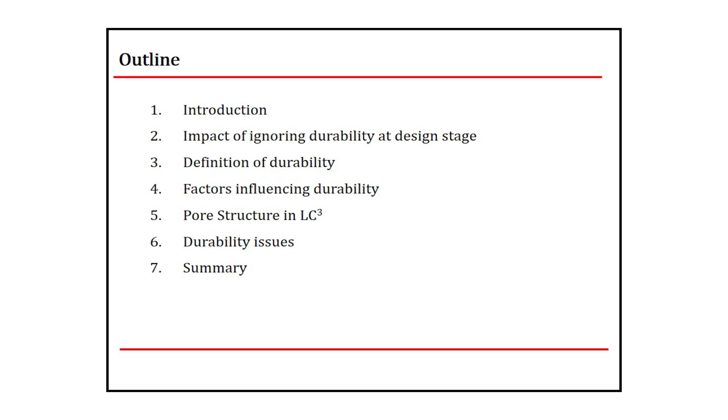This is a brief outline of my presentation: some introduction, impact of ignoring durability, how do we define durability, what are the different factors that can influence durability, something related to durability issues, and a summary.

First of all, when we design a structure, so far, how do we design it? We design it taking the tensile strength, compressive strength, and flexure. We provide the reinforcement detailing. For durability, what we do is we simply provide a cover, right?

Under the prescriptive guidelines, we have the water to cement ratio, minimum or maximum water to cement ratio we can go to, how much cement content we have to add, and finally a cover varying from 25 to 75 mm depending on the exposure class - severe, extreme - and we feel we are safe.

Is it adequate enough, or do we have to consider durability in a more specific way than just prescribing? Because nowadays, earlier it was just OPC, but now after every few years we are able to find more and more new SCMs. Do all these SCMs need to follow those guidelines, or do we have to do something better to assess these and change these durability requirements?

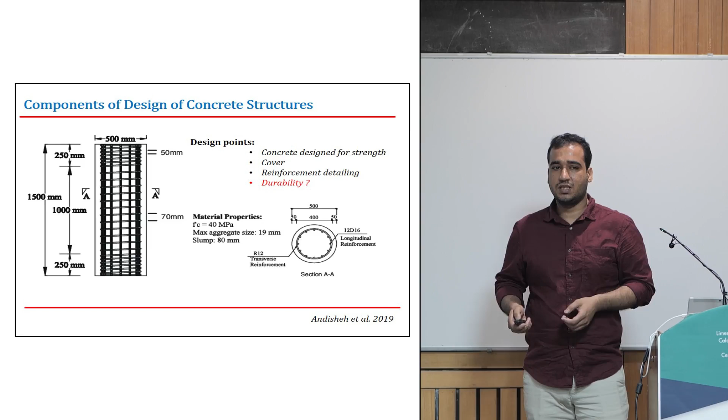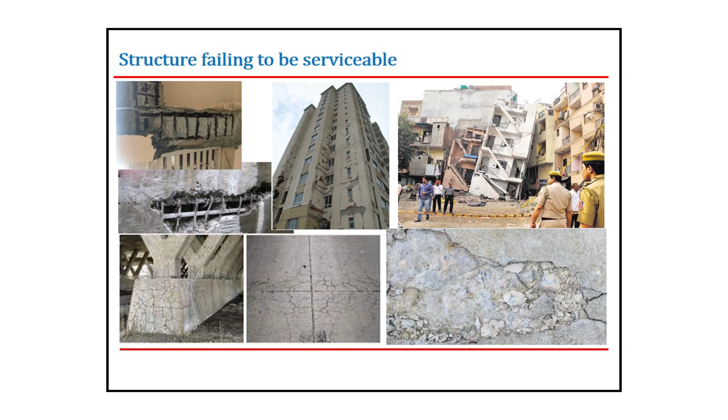These are some more pictures, from the recent site visits Professor Bishnoi did in Delhi NCR. You see lots of buildings, lots of cracks, some even toppled. So these are the issues that we face.

Now, do we take care of these issues at the design stage? Probably not. We need to consider that.

Now, a quick survey. How many of us actually believe that concrete durability is a property of it? I want the professors to sit out of this, let the students. How many think it's a property of concrete? Just raise your hands. Nobody thinks it's a property of concrete? So there are quite a few who think that durability is actually a property of concrete.

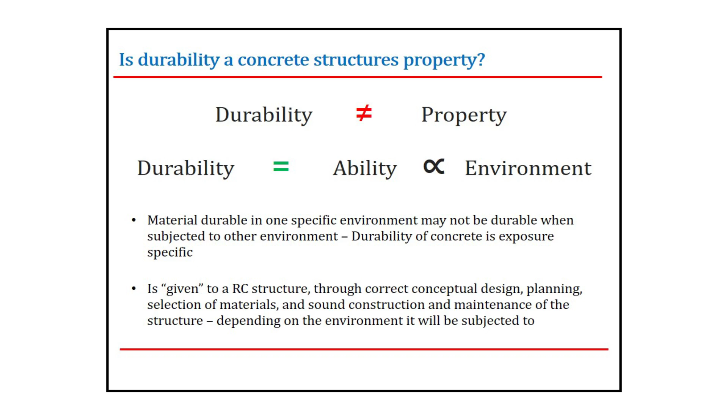Surprisingly, it's not a property of concrete. It's an ability we provide to the structure. We design it to be durable. Durability depends upon the type of material and the type of environment we are subjecting it to. So we have to design a material to be durable in a certain environment.

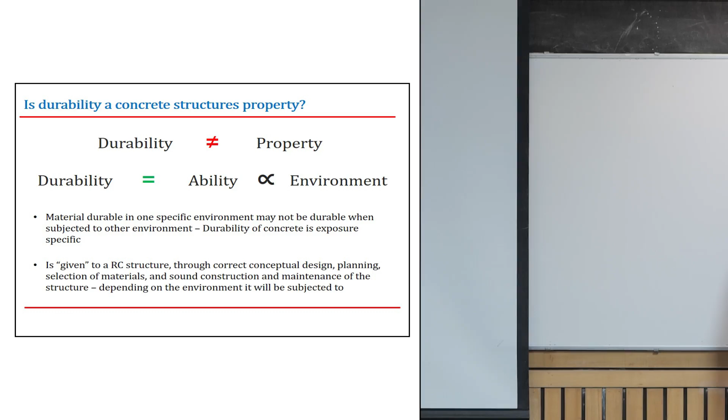And how do we design it? We design it by taking proper conceptual planning, selection of the materials, sound construction practices, timely maintenance of the structure, and all this knowing what environment we are going to subject the structure to.

Now, how do we actually define durability? So far it's an abstract kind of word, just like my friends talked about compressive strength, M25. When I say M25, I know what M25 means - it's 25 megapascal of strength. And if we are able to achieve it, then we say, yeah, that's the strength.

But what about durability? Are we able to do the same thing with durability? Can we label something as durable and subject it to a different environment and expect it to be durable again? No, we can't do that.

So how do we define durability - although over the years the view keeps on changing, I'm trying to introduce a relatively new view of durability. Maybe if you have read in the literature, you might be familiar with a different definition, so just bear with me, this is a new one: it's the ability of a structure to withstand the design environment over the design life without undue loss of serviceability or need for a major repair.

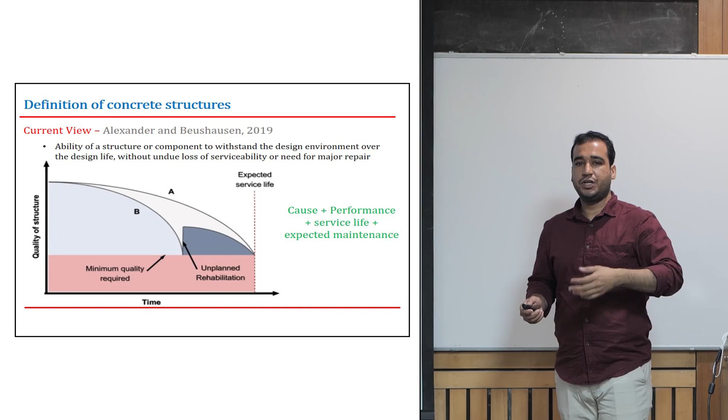Maintenance doesn't mean that you have to do a large scale repair of the structure. It means minimal cracks or some local damage you can repair with. It's not about completely scrapping the structure, repairing it, and then saying, see, it's serviceable again, look, it's having durability. No, you can't do that. It should have a limited type of failures - fissures, cracks - not a complete deterioration of the structure. If we are going for a major repair, then surely your structure is not serviceable.

Now, what are the common factors that influence durability? Just like I said, it's an ability that we provide depending on the environment. So how do we provide that ability? As a designer, we are flexible with the materials part.

Environment is not in our control, so we decide depending on the environment. This is a twofold thing where two different factors influence durability. One side is material properties - aggregate to binder ratio, water to cement ratio, porosity of the structure, air content, quality of concrete - and the other side is environmental factors, including temperature and moisture.

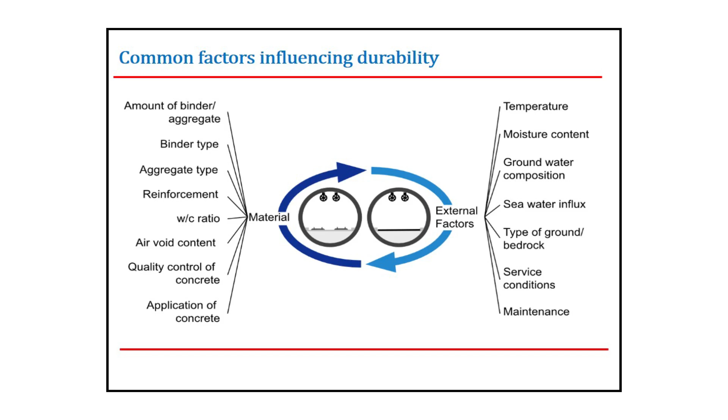These two things vary everywhere. You came to Delhi from different places, you must have felt the change in moisture and temperature. So those are the two things. Another interesting factor is groundwater composition, especially in Delhi, where in many regions groundwater has chlorides, which can be very deteriorating for your structure. Other factors are maintenance, other ions in soil or seawater, or carbon dioxide level in the environment.

Now the thing with durability is, unlike compressive strength which we decide at 28 days, durability is not something you can decide within a month or 90 days. It's design life. Can we wait for the design life to test something - cast concrete today and wait 50 years to see if we can use the same mix design for casting the structure? No, we can't. We have to pre-assess whether it will last for the next 50 years within a maximum time frame of 90 days.

So how do we do that? To assess this, we majorly focus on certain tests - some are accelerated tests, some are not accelerated but more property or material specific, like porosity and pore size distribution. This is one factor you would see discussed in every durability issue, because in concrete, all the transport happens through porosity and pore size distribution.

When we talk about durability, it's majorly about the ingress of species from outside the concrete to the inside of the concrete. So this is one factor you have to think about a lot when discussing durability.

Now there are other tests - water absorption, how much water your concrete is able to absorb. That gives you an idea if it's subjected to a dry environment, how much moisture will it take. With moisture, lots of things will be going inside. Depending on your wetting and drying cycle, you can decide how much it will absorb each time. Next is gas permeability.

One of my colleagues asked about carbonation. Carbonation is a gaseous phase, so it gets into concrete through the voids that contain air. So the permeability property for such things can be assessed by gas permeability, but I will explain in detail afterwards how it can sometimes be misleading if we just focus on one test and ignore the others.

Some other tests are resistivity - often we have the concept that if we have high resistivity, our concrete is more durable. We have this notion. Secondly, there are the rapid chloride permeability test or rapid chloride migration test. These are the two tests generally used.

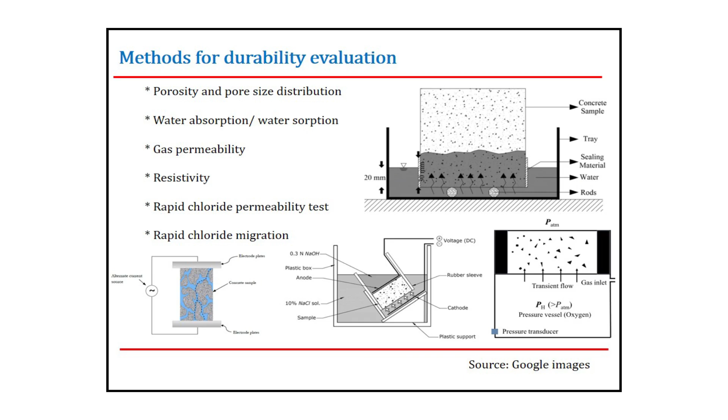First is the rapid chloride permeability test. This is the one test we often use for quality control - not much in India, but surely in other countries we do use it. And the next is for chloride environments, the chloride migration coefficient.

As chloride ingress takes place over the years, generally in the environment there is a lower concentration of chlorides. What we do is provide a potential field and monitor the ingress of chlorides under this potential. Within a relatively short time, maximum 4 days, we are able to assess what the chloride depth in the structure will be after many years - say 30, 40, or 50 years.

Now, just again a quick voting. So how many of you think you would know what's the major durability cause? Somebody can speak, no issues.

How much do you think corrosion would be an issue? 10%, 20, 30, 40? How much of the cases, just a ratio? Depends upon your environmental conditions. No, I'm saying throughout the world, what is the maximum or major issue that's happening? How much fraction of the total cause of deteriorations will corrosion be? 10% issues will be of corrosion, 20% or more than that? More than 10, 20, more than 30?

Surprisingly, you are well aware, but it's more than even 50%. So you see, most of our issues are of corrosion only. The cause of this corrosion can be different, be it admixed chlorides, chlorides coming from outside, or carbonation, or a macro cell of some kind. But the cause is different, yet more than 50% is corrosion.

Now, there are other ones. If you can guess some, what are the other durability causes that you can think of? Chloride attack - that comes into corrosion. Sulfate attack. What more? ASR.

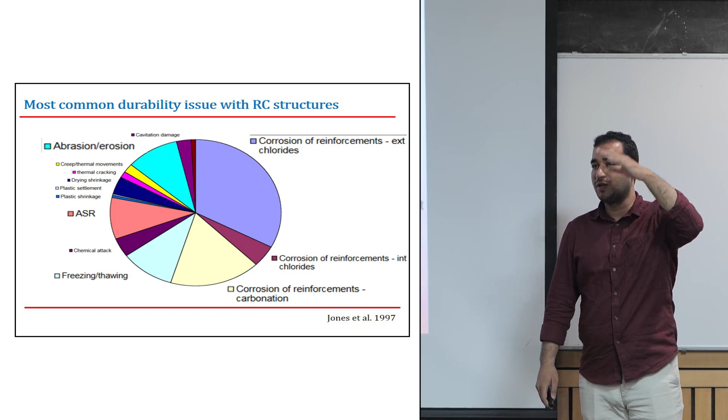Abrasion. Freeze and thawing. Generally in India we don't hear much about freeze and thawing, especially those of us living in states where we don't see much snow. And where we have snow, often there is construction of wood or something, so we're not able to perceive it. Then again, ASR - alkali silica reactions. Then there is sulfate attack, a chemical type of attack. Then there's plastic settlement cracks, creep, and thermal shrinkage cracks - these types of issues.

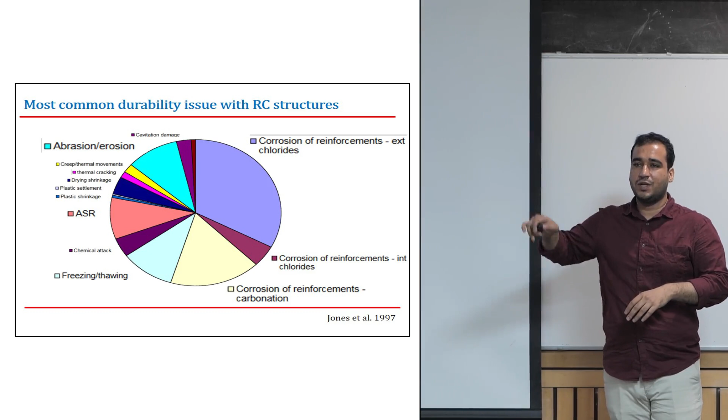So we have a huge variety of durability issues which we need to take care of at different stages. Sometimes after you assess, you can take precautionary measures to strengthen your durability life or your structure's serviceability limit as well. Now, I will be talking about a few of them, not all of them. If you have any queries about the rest, just contact me - I will try to brief you a few about other courses as well.

So before I get into each topic, since this is a workshop on LC3, and I told you pore size and pore distribution is the one thing that influences everything, I want to let you know about pore size distribution and porosity of an LC3 system. If you assess LC3 system porosity by water absorption or even MIP, and you just look at the final value, you would generally see that you are getting a higher value compared to OPC.

That's even the case with most blended systems. If you do an MIP or water absorption test, you are probably going to have higher porosity than OPC. But does porosity alone decide the transport, the damage, or the ingress of species? Most of us think yes - to be honest, I was the one thinking that too. So, not a big thing, it happens.

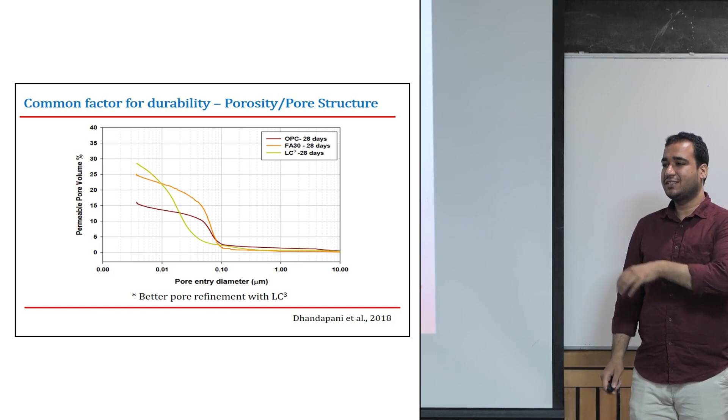We feel that it's the porosity that decides it, but it's not actually the porosity. It's more the pore size distribution, the interconnectedness of these pores, the surface charges of pores, the fractal dimensions - there are lots of other things.

Now, the interesting thing is, in case of blended systems like PPC or LC3 compared to OPC, your pore size distribution is way different than OPC. In OPC, you have coarser pores from 100 nanometers to 1 micrometer - a huge dimension of these pores, and the major chunk lies in that range.

But when you come to LC3 kind of system, you see most of the pores are 10 to 100 nanometers. And the chances of these smaller pores being not connected is much more than the chances of the maximum size pores being not connected.

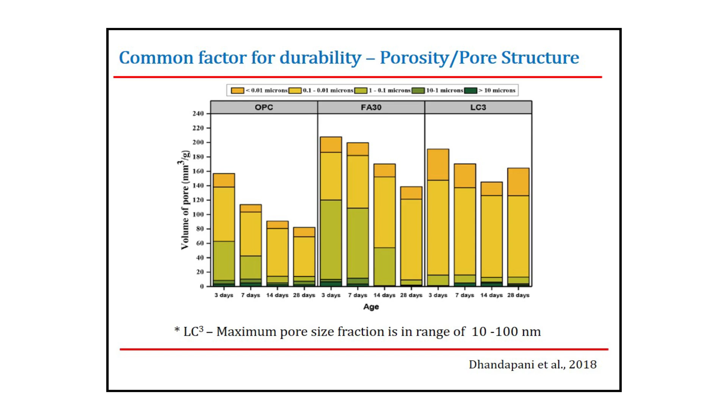So we have to take care, when we talk about durability, that we don't just take one property and rely on it. We rather need to look at two or three properties to properly characterize our material when we say if it's durable or not. It's not just one property - if it's giving me high resistivity, it's durable for everything. No, it's not like that. If it's giving me high porosity, it's not durable - no, it's not like that either.

When you do these kinds of comparisons, it's better to do so with the same kind of composition. If you're looking at OPC at 0.4, 0.5, 0.6 water-cement ratio, then it's well and good - you can compare it freely because whatever is there in porosity will be reflected in the pore size distribution also, since the blend composition is the same. But when you change the composition, would things remain the same? No, it doesn't. So when talking about different blends, I would rather say look at more than just singularly focusing on one property, because that one property can be misleading for you.

Now let's see the effect of this different pore refinement and how it happens.

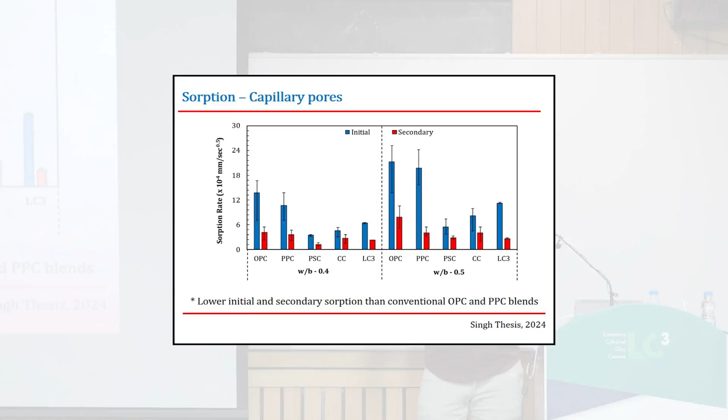and how it influences other properties. One of the quick methods is absorption. Water absorption rate and water absorption are two different things. Rate gives you an idea about the rate of ingress. Water absorption gives you the total volume absorbed, which tells you about porosity, while the rate gives idea about the rate of ingress of moisture or water into the concrete.

If you see here, compared to the blended systems versus OPC, the blended systems always try to have a lower sorptivity, especially the blended system at 0.5 water to cement ratio, the ones with slags, composite cements, and LC3. They give much lower initial sorptivity and much lower secondary sorptivity at both water to cement ratios.

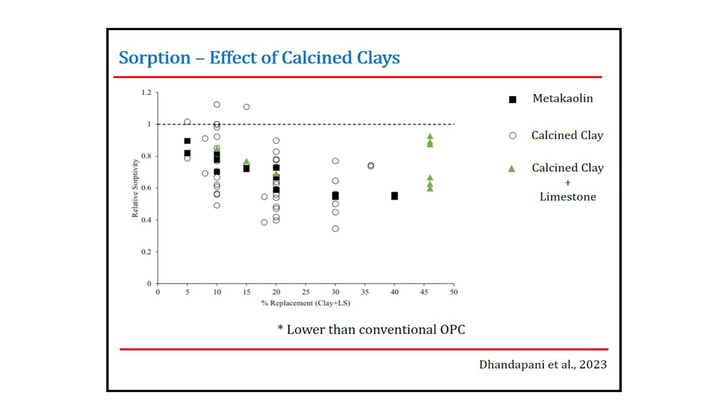To compile, this is literature from Dhandapani et al. from 2023, a RILEM paper reviewing durability issues with calcined clays. You can see that when we consider different metakaolin blends, or individually calcined clay, or a combination of calcined clay and limestone, we always end up with lower sorption compared to the OPC system.

That's because we are refining the pores. Our pore size distribution is changing. The porosity may be higher, but our refinement is so good that the ingress of water itself gets reduced. Now, knowing these things, let's get into the actual durability issues we talked about: corrosion and chlorides, or ASR.

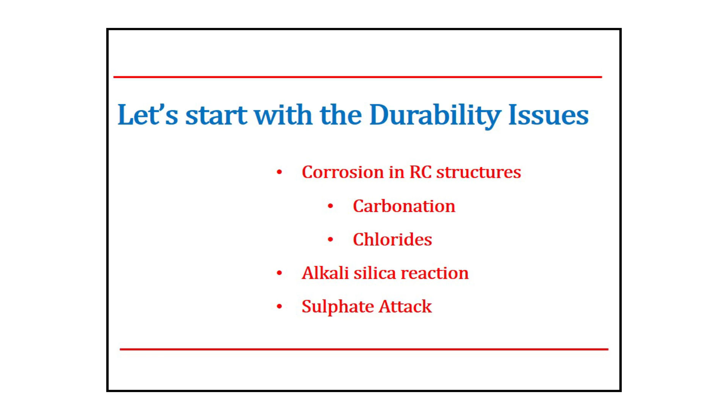So I'll be talking about corrosion in RC structures, and the major two causes for corrosion in RC structures are carbonation and chlorides. So we'll talk about those two. Then we will talk about alkali-silica reactions, and then sulfate attack also. If you have any queries other than these, just let me know afterwards, I will talk with you.

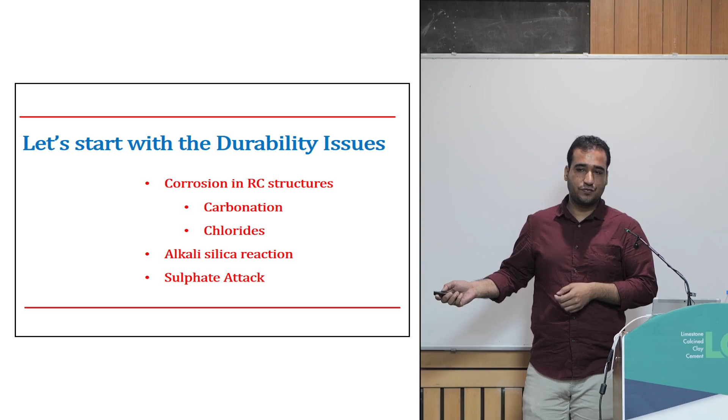So when we talk about corrosion, one of my friends just said, okay, chlorides - when we say durability issue, it's not corrosion. Sometimes we think chlorides and corrosion are different. The thing is, in terms of corrosion, we divide the total life into two stages: one is the initiation stage, another is the propagation stage.

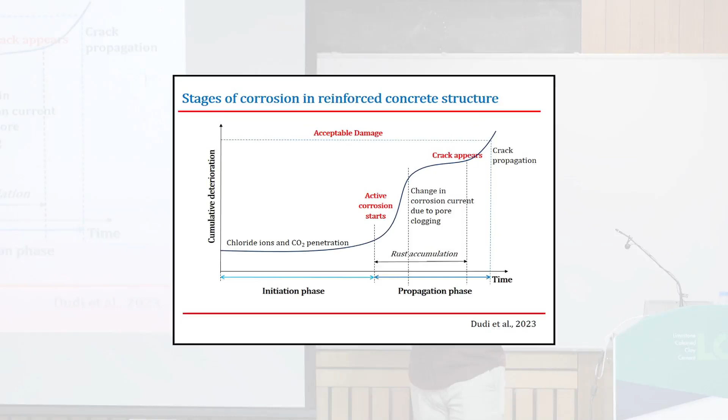Your initiation stage is the part where chlorides or carbon dioxide ingress into the structure and lead to active corrosion - the point where the rebar starts to actively corrode. Now, the reason for this active corrosion can differ between chlorides and carbon dioxide. I will talk in detail about that afterwards.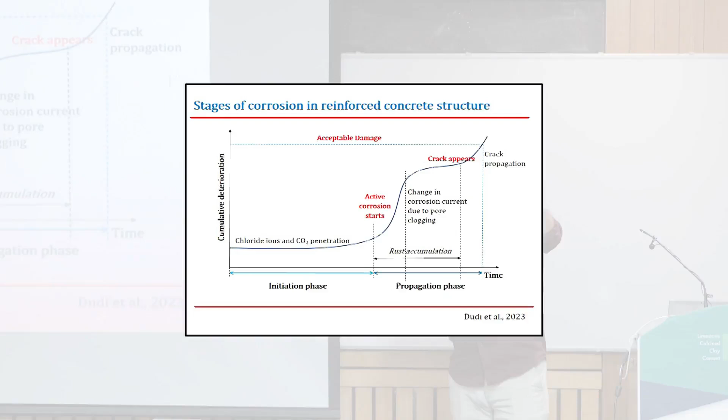So once this active corrosion starts, rust starts forming. Once this rust starts forming, it builds up, and the rust has a much larger volume compared to the parent metal, iron - it can be 2 to 6 times more than the iron itself. Now you can think, if I have a hole of this size and try to squeeze more into it, it will start to burst.

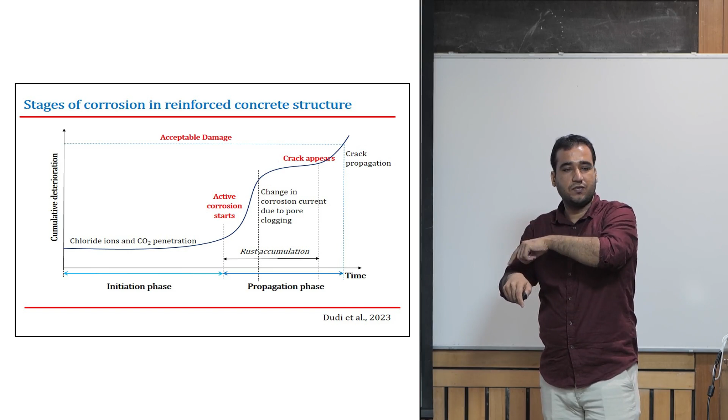That's what we say - cracks start to develop, cracks start to form. These cracks will start from inside near the rebar and eventually appear on the surface, reaching the surface. After this crack reaches the surface, the paths that were initially through the concrete can now be direct through the crack itself, so your rate of deterioration will suddenly jump up.

Depending on your design criteria or a designer's view, this acceptable damage limit can be here, here, or here. Generally, right now we think of it as here - we don't want corrosion to even initiate. That's how we consider acceptable damage. But then we are ignoring the life of the propagation phase itself.

But we need to know, can we consider this? Because sometimes this can be a huge chunk of our life. When talking about a structure, this can compose a significant portion, maybe 10 to 20 years. Nobody would want to destroy their structures 20 years before. So we have to assess this propagation phase as well.

Now let's see what corrosion is. Corrosion is an electrochemical reaction where you form anodes and cathodes, either on the same rebar or on a different rebar, depending on your distribution of rebars.

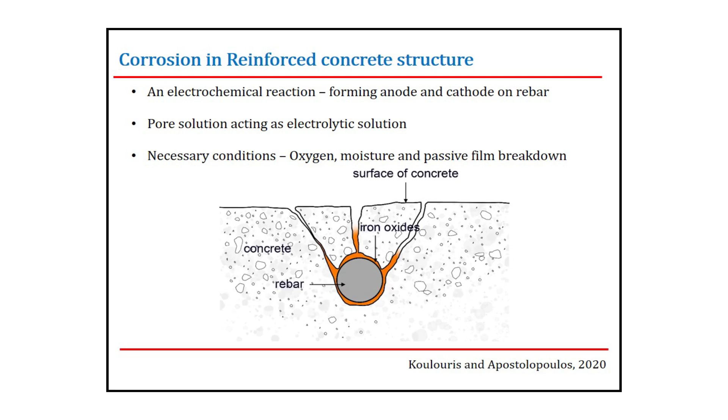In any type of cell where there's an anode and a cathode, you see a connection made outside where we monitor it, but inside there is also a solution which provides the connection for ions to travel. In our concrete, this connection is provided by the pore solution that exists in the pores of the concrete itself. This is the connection that works.

Now, corrosion doesn't start with just chlorides reaching it. There are certain necessary conditions. When all of them are met, only then will corrosion occur. Otherwise, it will just be waiting for the other conditions to come.

One is oxygen—you need oxygen at the level of the rebar. Another is moisture—you need pore solution. If you have water, then only will you have pore solution. So you need moisture at the level of the rebar, and you need a breakdown of the passive film.

Most of you have heard about the passive film, I guess. I hope so. If not, just a brief slide about passive film for you guys. In concrete, we have a pH more than 12. This is a Pourbaix diagram for iron.

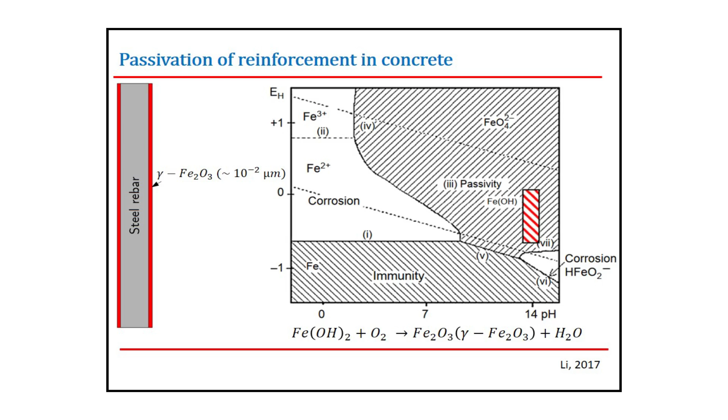When you increase the pH, there are different zones where iron can be stable, immune, corroding, or in a passive film stage. In concrete, we have a pH of around 12 or greater. So in this range, at this potential, you see there is a layer of passivity.

This is a kind of layer that forms around the rebar, gamma Fe2O3. That's a protective film which doesn't allow the rebar to corrode under these conditions. Luckily, this is the thing with our concrete—we always have it in a passive zone unless somehow we destroy this film.

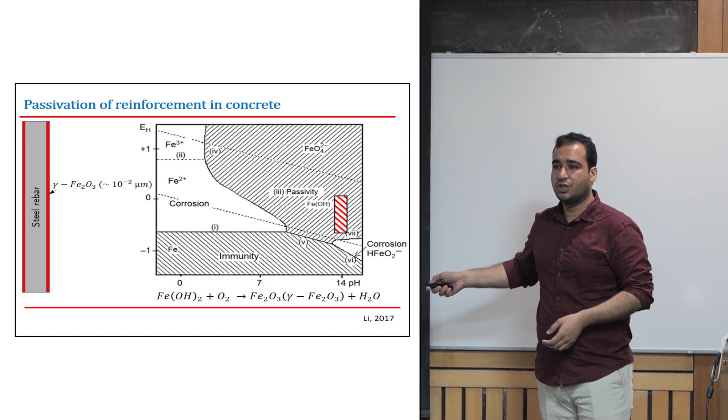Now the cause of destruction of this film leads to these kinds of structures. You might have seen around, if you're in Delhi or somewhere, a chunk falling or rebar being visible somewhere. Or sometimes it can be much more drastic.

You must have heard about the recent cases of Chintels or Greenview in Gurgaon, where a complete slab fell down in a living building, in a common area. So these are certain kinds of situations when this passive film gets destroyed. You start seeing rust marks, you start seeing cracks, and your structure starts to appear non-serviceable.

I don't think any of you want to live in a room where you have a roof like this. I think nobody would like that. So, to summarize, what can be the consequence of this destruction of the passive film in corrosion?

Initially, the penetration attack starts. You start to lose your rebar diameter and rust starts to form. The rust will lead to generation of voluminous rust product, the loss of iron. This will start inducing tensile stress into the concrete and you will start to see cracks.

These cracks, when you see them, will start to lead to loss of the bond you have with your rebar and the concrete. So the distribution of stresses which were happening through the rebar to the concrete, due to bond development, you start to lose that.

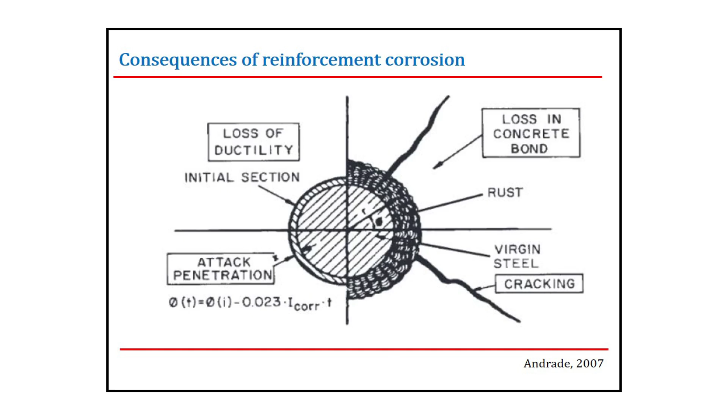And when you start to lose that, the collective effect of this and the penetration attack, the loss of rebar, you start to lose ductility of your structures. Sometimes you see a sudden collapse of the structures. These are the critical consequences when you ignore corrosion in structures.

Now coming to what I talked about—what are the main causes of corrosion? Often, the main causes of corrosion that we see are carbonation, one reason, and another reason is chlorides.

What happens in carbonation is atmospheric carbon dioxide gets into the concrete system and reduces its pH, and you start to lose the passivating film. I showed you that at around 12 only you have a passivating film, but once your pH starts to fall low, you don't have that passive film anymore protecting you from corrosion.

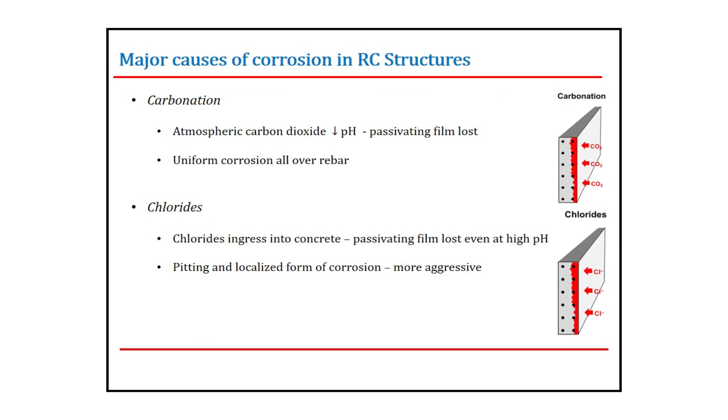It's destroyed. In case of chlorides, chlorides get into the concrete and locally destroy the passivating film. It's not like carbonation where the whole front is moving—it's just locally, at a point, that the passivating film is lost due to the chlorides being there.

Now, the difference between these two types of corrosion starting from these two causes is: in terms of carbonation, you see a complete front, and your rebar will be corroding throughout—you have lots of micro and macro cells nearby each other. But in case of chlorides, it's much more different.

In chlorides, you will see that at one point the rebar is lost considerably, at other points it's not lost. But then again, it's more harming than this type of corrosion.

Now let's start with one of the processes, carbonation. Carbonation is the process where atmospheric carbon dioxide gets into the concrete through the voids that contain air, and it meets with the water, dissolves into it, and forms carbonic acid.

Concrete, as everybody knows, has calcium hydroxide, Portlandite, sodium, alkalis, Na2O equivalent. We all calculate this. All this reacts with the dissolved carbon dioxide and forms carbonates. Carbonates don't like to dissolve, they like to get out of the system. They start to precipitate, and their precipitation means calcium is also getting out of the system.

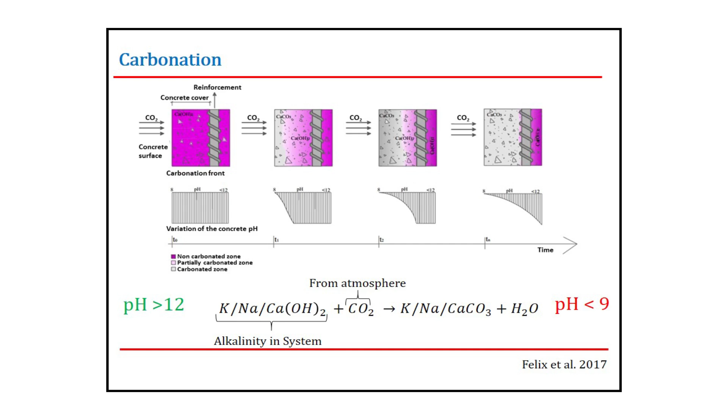This pink color shown is a phenolphthalein indicator. When you spray phenolphthalein, when pH is greater than 10, you have a bright pink color. So you see with the carbonation front moving, this pink front is moving backwards. When it reaches the rebar, you see the pH is less than 9. Now when pH is less than 9, you have lost your passive film, which was actually protecting you from corrosion. Now the active corrosion will start.

So carbonation. If we see different carbonation species, we see that for different blends, the carbonation rate is different. In comparison to OPC, all the blended systems will have a higher carbonation rate, because in blended systems the Portlandite reacts with the SCMs.

This forms secondary hydration products, which leads to consumption of calcium hydroxide. This consumption leads to a depletion of alkalinity already in the system, so we get a higher carbonation rate. But consequently, depending on the water to cement ratio, a common approach we use for tackling carbonation is to reduce it.

You can see at 0.5, the carbonation depth is much higher, and at 0.4 it's much lower than 0.5. So if carbonation is your major cause, what you can do is simply change the water to cement ratio if you are worried about carbonation. Changing the water cement ratio will provide enough time before the passive film gets destroyed.

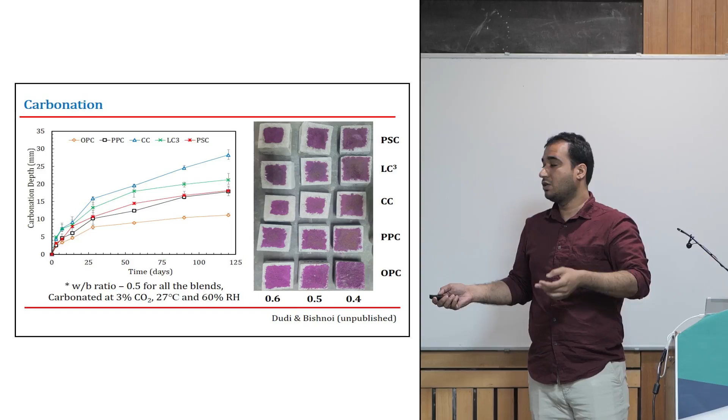Now I was talking about gas permeability. For performing the gas permeability test, we dry the concrete, and then under pressure we observe the loss of pressure of oxygen or nitrogen after a certain time of decay. It's a falling head type of test.

In these blended systems, which have pore refinement and less interconnectedness, they appear to give a very good low value of Darcy's K. So you would think that if carbon dioxide is getting inside at the same rate, we are probably better off in the blended systems.

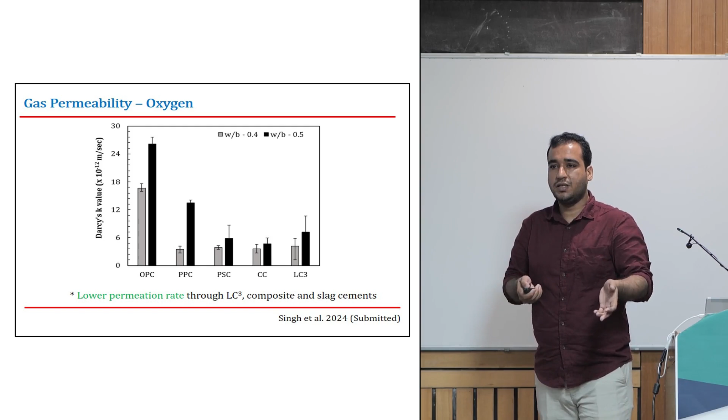But does it need to be just gas permeability that's deciding it? Probably not. It's the reserve alkalinity too. The term reserve alkalinity means the buffering capacity of the system to counter carbon dioxide increasing in the system. In blended systems, the total alkalinity is lower compared to OPC, which has quite high total alkalinity. So it's a combination of two factors.

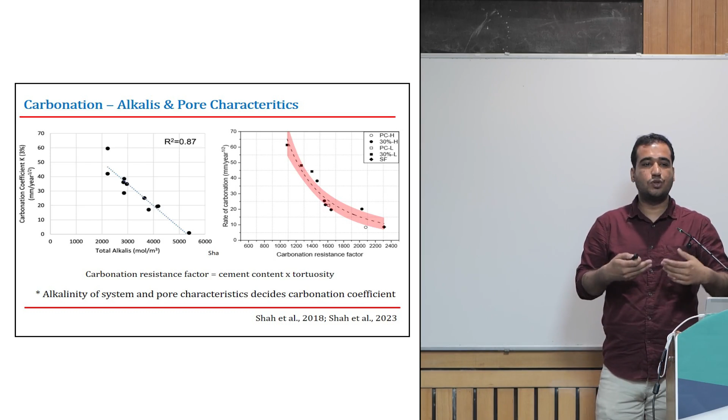When you combine these two factors, you see a nice trend. Your alkalinity combined with the pore characteristics is what helps you assess the carbonation coefficient of your structures. Using one factor alone may not be a good idea; it's better to take two or three multiple tests and combine them to see the main result.

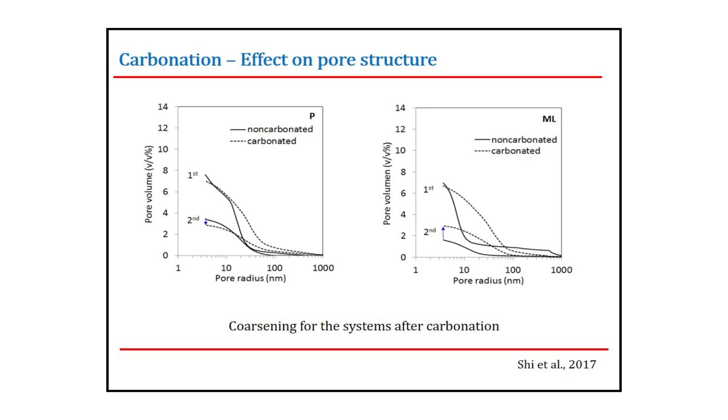Before I jump into corrosion, carbonation also has an effect on the pore structure itself, because you are dissolving the calcium hydroxide in the system, which was solid before. When it dissolves, you precipitate calcium carbonate, which is again solid. So you are changing the pore geometry of your structure.

For Portland cements, it leads to coarsening, and for metakaolin blends, it also leads to coarsening. So the effect of carbonation is similar across the type of blend, be it for limestone, calcined clay cement, or OPC.

You observe a coarsening in both kind of systems. Now coming to the carbonation induced corrosion.

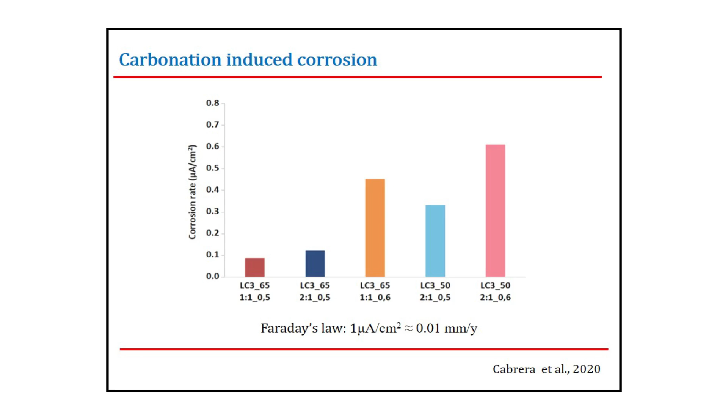This is a study where they carbonated samples made with LC3 and observed the corrosion rate. The corrosion rate values are in the range of 0.6 microampere per centimeter square. These are typical values you observe when the structure is carbonating and corrosion is present. In terms of carbonation induced corrosion, these are typical values.

But when you convert these values to millimeter per year, you see it's less than 0.01 millimeter per year. So you can see it's not that harmful for your structure as you would expect it to be.

To elaborate more, there is a study that compiles literature about how at different relative humidities the corrosion rate changes. Unlike chlorides where the structure is in contact with water, structures subjected to carbonation generally have variation in relative humidity. At different relative humidities after carbonation, the corrosion rate can be different.

The corrosion rate will be high when the relative humidity is quite high. But we all know our structures are not always wet, especially the ones we commonly live in.

It's subjected to daily and seasonal fluctuations, wetting and drying cycles. If you get a rain spell or splash some water, you see a spike in the corrosion rate, but when it's dry it comes down again. So it's a dynamic, continuously fluctuating process. Often we study at extreme conditions of corrosion rate.

We can't directly interpolate that into the field. We have to consider that the variation of daily relative humidity and saturation level is going to affect our structures.

Another thing is, in terms of carbonation, what's more dangerous is shallow cover depths. You don't provide adequate cover depth, which gives quite less time of saturation. You splash it and it directly gets saturated, and you get coarse pore structures because cover depth is less, so aggregates were not able to get there.

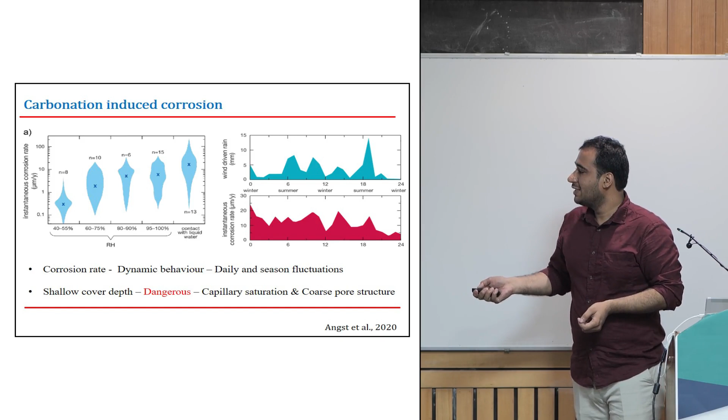It's kind of a cement paste with only finer aggregates, so you get coarse pores. These kind of situations are more critical in terms of carbonation rather than when you provide sufficient cover depths.

This is a literature study we did on a half-century-old structure that was still serviceable up to last year. Now we demolished it because we need more space and more flats in IIT Delhi.

Only certain regions had high corrosion rate; rest of them were quite low, in micrometers per year. Only the regions which were quite moist and repeatedly subjected to moisture and water showed quite high corrosion rate values.

These regions are specific. Then again, in regions where the carbonation depth was quite high, corrosion rate was not high. These are indoor environments where we live, with low relative humidity, so the carbonation front can move faster. But since relative humidity isn't high there, we don't get much corrosion rate.

So it's not a widespread corrosion in a structure when it gets carbonated. It's more of a location-specific reason.

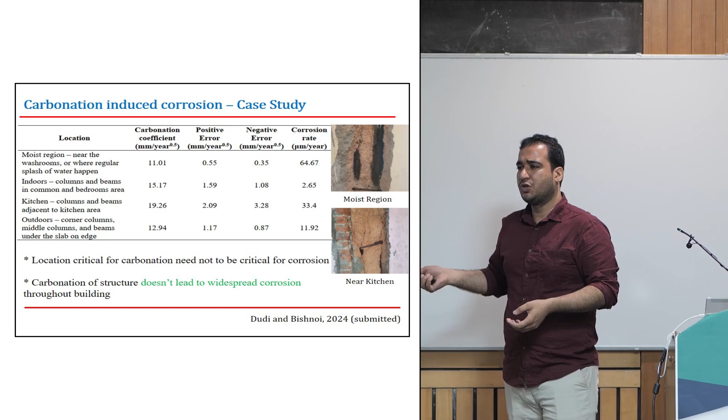So if we consider these kinds of things during the design stage itself, especially when we are being pushed toward blended cements because of sustainability needs, we will probably be able to take care of corrosion due to carbonation. Now coming to chloride ingress, we see that chlorides get into the concrete from many sources.

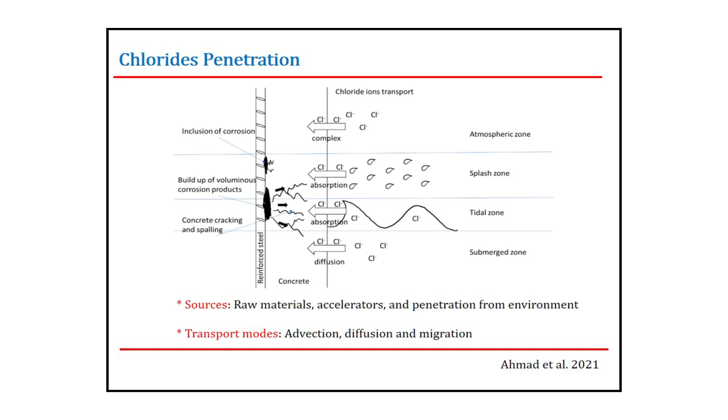Sometimes these are admixed because of the water or the aggregate, or sometimes it's penetration from the external environment, be it contaminated soil, groundwater, or sea water. The major transport mechanisms of these chlorides are advection, diffusion, and sometimes migration.

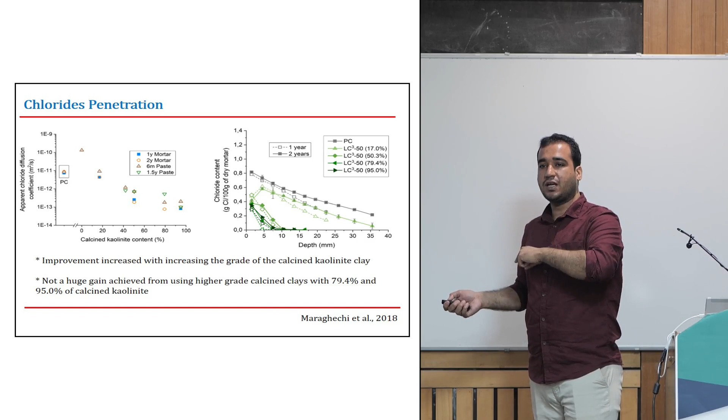It's much better compared to the OPC system here. To show you more results, these are the charge transport values comparison of OPC, PPC and LC3.

You can see that LC3 charge transport is almost negligible for all the mixes compared to OPC and PPC. In fact, even at 28 days, as we talked about pore refinement in Professor Srijit's lecture, in LC3 this pore refinement happens quite fast. So even at 28 days, you see the charge values are negligible.

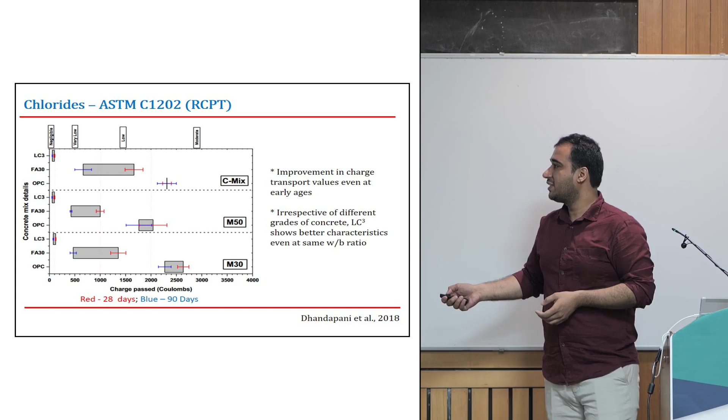But for other cases like fly ash, after 90 days you start seeing an improvement. But then again, it's not as good as LC3.

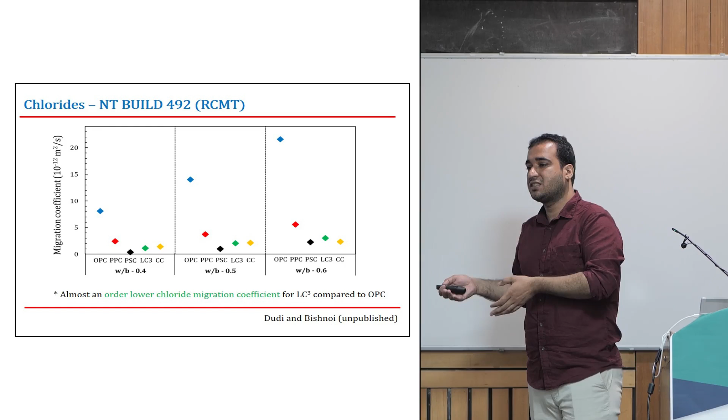These are some more results, the apparent diffusion or migration coefficient. You see, compared to OPC, the blue dots, the green dots are much lower. Even at water to binder ratio of 0.6, you have a lower migration coefficient compared to OPC at 0.4. That's how good your pore refinement is, and that's how enhanced the chloride binding is in the blended system with calcined clays.

Now coming to chloride induced corrosion, unlike carbonation induced corrosion, chloride induced corrosion is different. Here pH is not affected throughout the concrete. Chlorides penetrate into the concrete at the same pH.

They destroy the passive film locally at one point, and anode and cathodes are formed. Anode is limited to this pit only, whereas cathode is limited to the whole rebar. So you see there is a high gap in anode to cathode area ratio.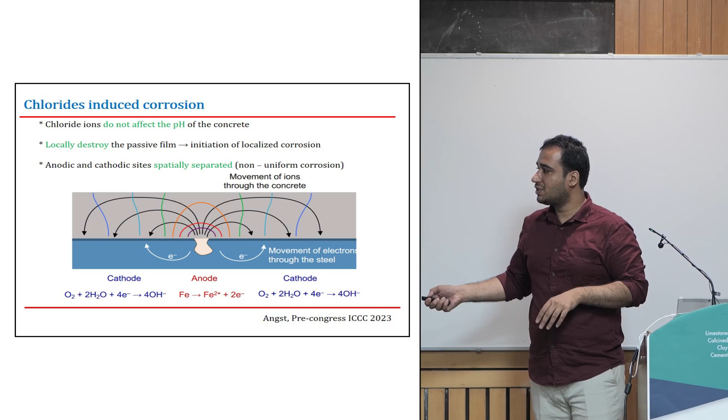There, in carbonation, it was both being near to each other and widespread. Here the cathodic area is much larger than the anodic area. So whatever potential is driven is by this region only, and that's why we observe more pitting-like corrosion.

To be more specific, this iron, when it starts dissolving, forms iron oxychlorides which start hydrolyzing. In this hydrolyzing process, hydrogen is released, and locally inside the pit you start having an acidic environment. This acidic environment brings down the pH inside that pit only, not the whole concrete.

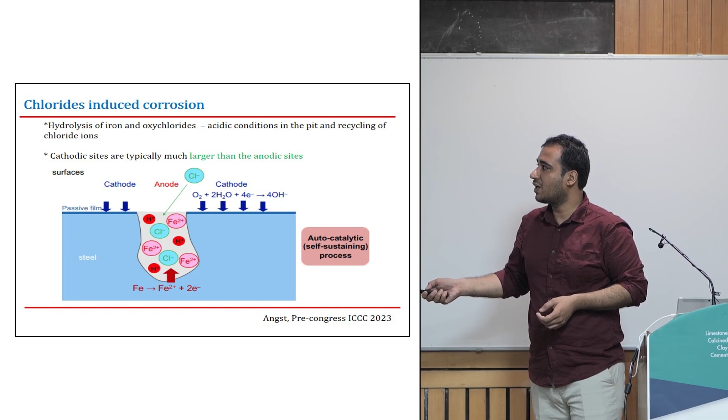If we know the influence of corrosion rate on pH, under acidic conditions it's much more aggressive than near neutral or alkaline conditions, and we get an autocatalytic process because these chlorides don't get consumed in this process. Because of hydrolysis they keep getting released and maintain this concentration, leading to a very aggressive situation with much more drastic loss at the same point.

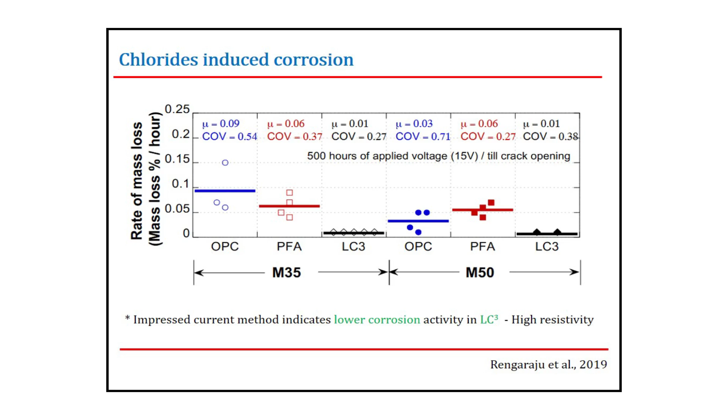Some results from this chloride induced corrosion. This is an impressed current test apparatus. The potential was provided and the test setup was run until a crack appeared on the concrete surface.

You see in LC3, if you compare the mass loss percentage, it's much lower than OPC and PFA. That's because you have a high resistivity in the LC3 system.

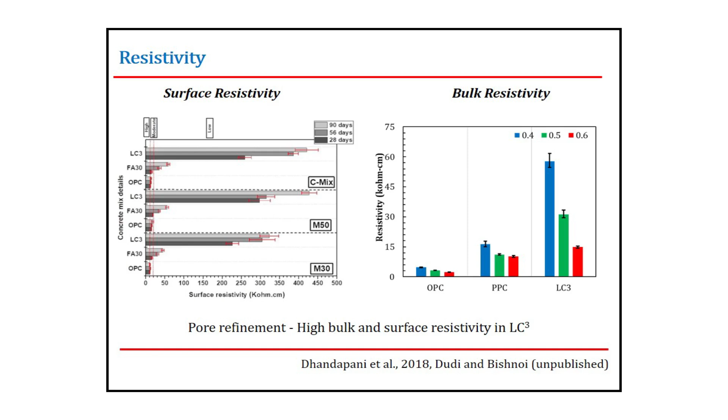You can see at different ages, compared to OPC and PPC, your surface resistivity is quite high for the LC3 system. Even your bulk resistivity is quite high. At water to binder ratio of 0.4, you can see it's quite high, and again these surface resistivity values are quite high.

This resistivity influences your corrosion rate. If you're having high resistivity, you're probably going to have a lower rate of corrosion in the structure.

Now coming to alkali silica reactions, this is a type of reaction we don't generally see at an initial stage. Sometimes we have reactive aggregates in our concrete, and the glassy content of these reactive aggregates is quite high. When they come into contact with the pore solution, which is generally alkaline in nature, you start to form gel-like structures.

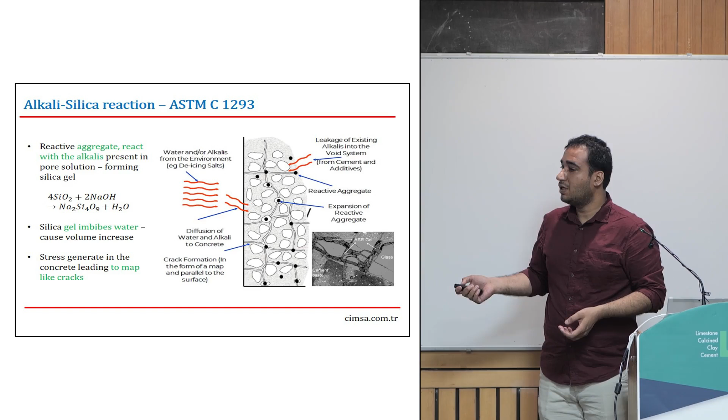These gels have a very high affinity for water. They start absorbing water, and once they start absorbing water, they start swelling up. Because of this swelling, it generates pressure on the aggregates. This pressure will eventually lead to the development of cracks in the structure, which will lead to other ions ingressing quite fast into the structure.

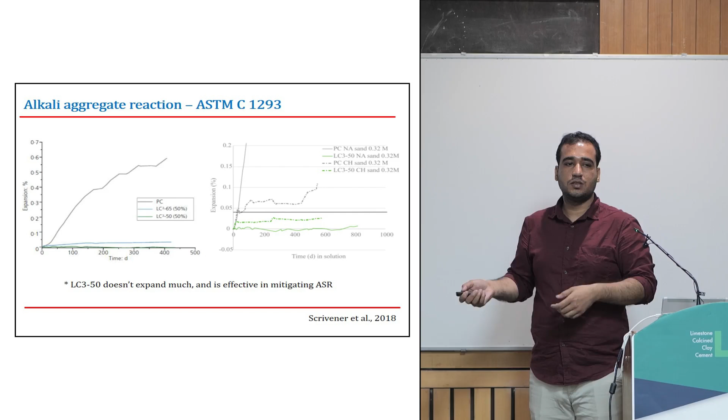Since we know this is because of the alkalinity of the system, in blended systems, we already use this alkalinity for secondary hydration. So we are bringing down this alkalinity, and often this alkalinity comes along with the clinker. In SCMs, it sometimes doesn't have that high alkalinity. In certain situations like this, Lc3 doesn't expand much, it's much lower than OPC, so you are able to mitigate your ASR problem.

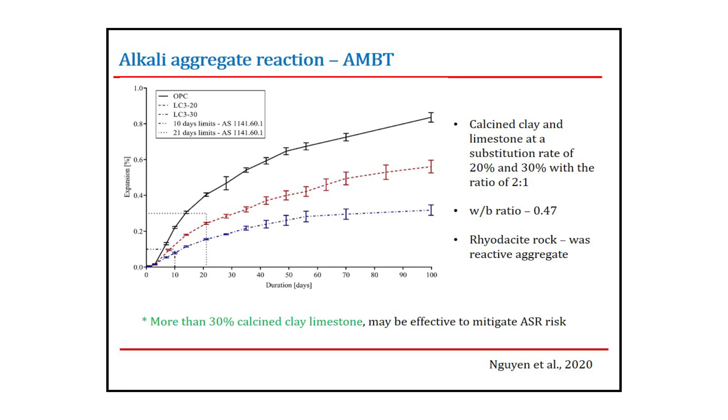This is a test setup as per Australian standards. They wanted to have a concrete with reactive aggregates that can pass the limit of expansion if we construct using those reactive aggregates. When we used 30% calcined clay, they were able to mitigate this problem. This was the stable expansion level they wanted in the structure. OPC crosses over this point, but in case of blended systems like Lc3, it was much lower. So with help of Lc3, you can mitigate alkali silica reaction.

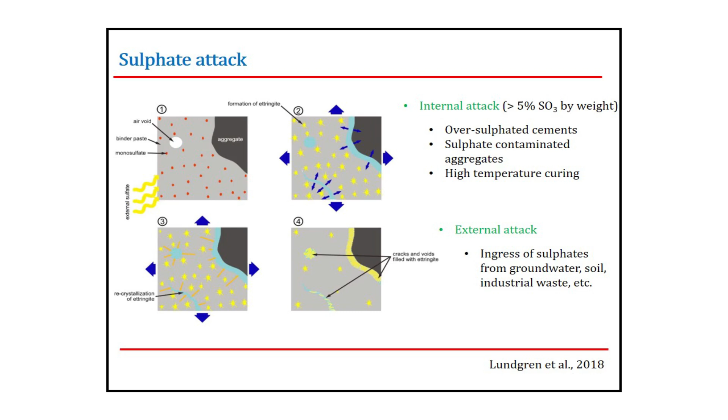Coming to sulfate attacks, these can be of two types, internal or external. Internal is from excess sulfates present in the concrete when you cure it at high temperature, generally monosulfate is formed. But when you cool it down, this sulfate bound in the CSH gets released, and this monosulfate gets converted into ettringite. Ettringite, again, because of its high volume and needle-like structure, starts exerting pressure, and you start seeing crack development.

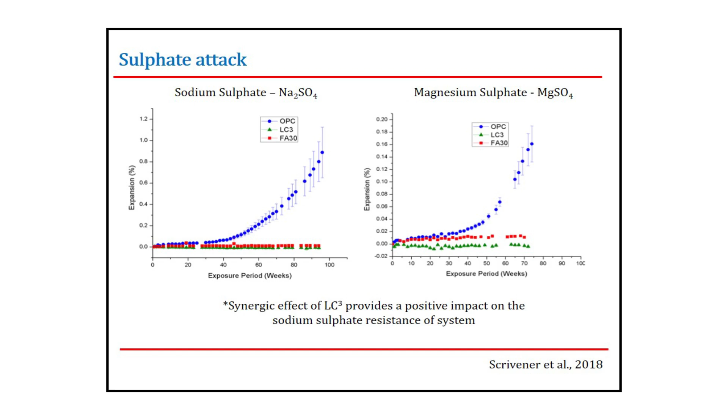External attack is when sulfate comes from an external source, ingressing from outside. Interesting thing from yesterday's presentation - because we have carbonates in the system, we stabilize the ettringite, and monosulfate is no more formed. So because of the carbonates, there is no monosulfate in the system. So even if sulfate comes from external sources, there is no more monosulfate, so the attack will be on the calcium hydroxide and gypsum will be formed. You don't see that kind of expansion with Lc3 and PPC systems where carbonates are present. So Lc3 is able to mitigate your sulfate attack also.

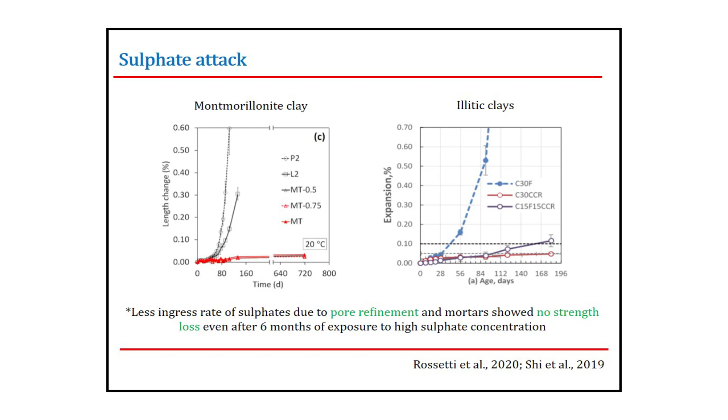This is also good in another way - because of the pore refinement and lower sorption capacity, even if you use different clays, since your rate of ingress is quite low, even at repeated cycles, you won't have the same kind of damage that appears in case of OPC systems. For Lc3 systems, you require more cycles of exposure to have the same level of damage.

Now, just to summarize things, how can we decide a structure's durability and why do we need it? When we are designing a structure to be durable, we need to design it at the designing stage only. We have to consider what water cement ratio we are using, whether we have to provide sacrificial cover depth, and what different exposure environments we are going to subject our structure to. We have to take care of these things and plan accordingly.

We have to regularly maintain and inspect our structure. If we find a cause of deterioration, we don't just go and patch repair it - sometimes there can be a different underlying cause and repairing it may not be enough. You are just putting a facade over it, beautifying it doesn't mean the cause has been rectified. You have to sometimes do periodical inspection, a detailed survey of the structure to know what the underlying cause is so you can timely tackle it.

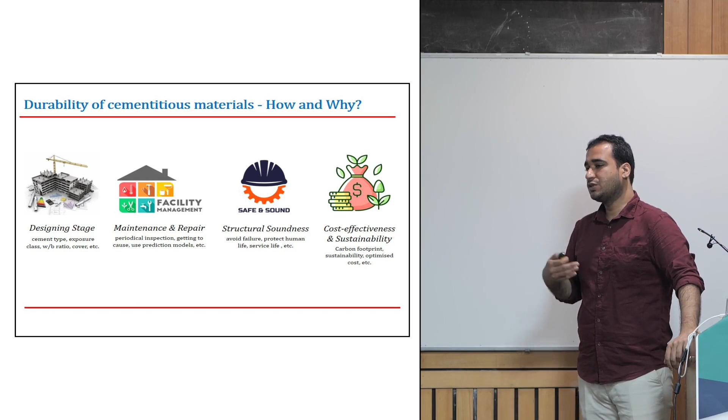If you ensure these two things, you are ensuring structural soundness and protecting human life. Also, if your structures last longer, you have a relatively lower cost, because with the same cost you get a longer life. But if a structure is deteriorating, for the same cost you could have 20 years of life instead of 50, if you take care at the design stage and regularly maintain it. Finally, these solutions can be cost effective and very sustainable. These things will be talked about in further lectures - how these solutions can be sustainable and how using them can bring down even the cost of your constructions.